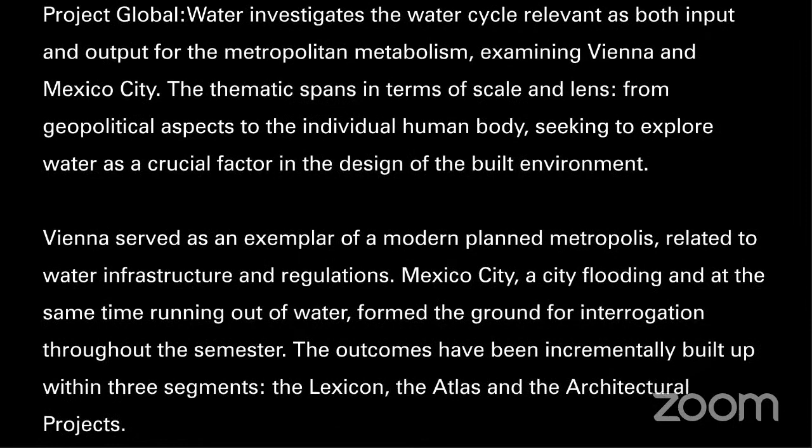Vienna served as an exemplar of a modern planned metropolis related to water infrastructure and regulations. Mexico City, a city flooding and at the same time running out of water, formed the ground for interrogation throughout the semester. The outcomes have been incrementally built up within 3 segments: the lexicon, the atlas, and the architectural projects.

Through keywords, objects, institutions, ideals, and failures, 60 lemmas set up a lexicon, aiming to explore water systems and their components on a global scale.

From fresh water to waste, and from water culture to conflicts and control, the selected lemmas interrogate the space between optimization and disaster, mythology and politics, potable water and commercialization, underlying a collective understanding of the framework.

11 maps of Mexico's past, present, and future, and 4 mini-atlases related to the water cycle, relate the principles, as documented in the lexicon, to the specific geographical, social, and cultural characteristics of Mexico City and the surrounding territory.

From the ancient Altepetl to the 2021 ninth largest metropolitan area in the world, the Valley of Mexico has always been dominated by water issues throughout history.

The aquifer, along with the water supply, consumption, and waste, remain the 4 main reference points that inject the metropolitan metabolism to the natural flows of water.

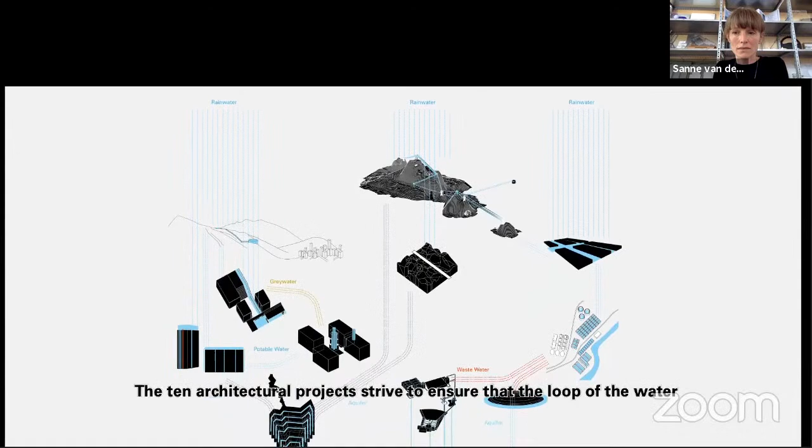The 10 architectural projects strive to ensure that the loop of the water cycle is never threatened, proposing a stable water supply for the inhabitants of Mexico City.

To resurrect Mexico City from its current predicament, the contributions propose a future with the possibility to expand the water systems through different time frames for both singular and prototypical projects, while growing within its territorial conditions.

The water-related inputs and outputs for the metropolitan metabolism are broken down to categories: aquifer, water supply, consumption, and waste, composing Mexico City's water cycle.

When facing the paradox of a city flooding and at the same time running out of water, how can architecture contribute towards balancing the aquifer's twofold nature?

While inequality in water distribution remains a recurrent contention, how can communal interventions contribute towards a new water supply system within the existing urban fabric?

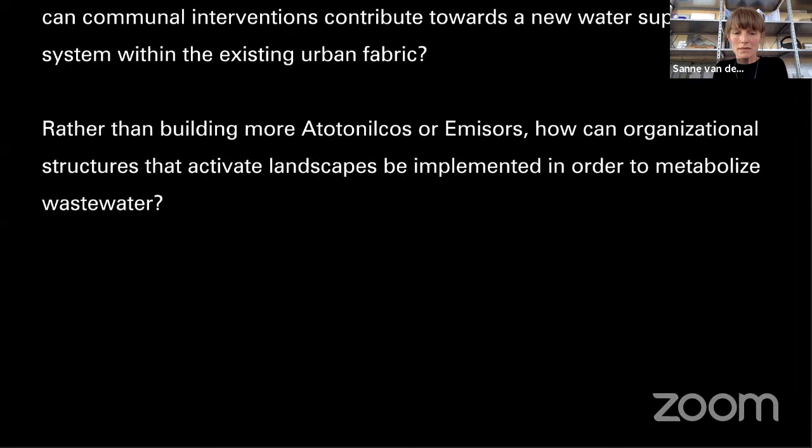Rather than building more atotonilcos or Emisors, how can organizational structures that activate landscapes be implemented in order to metabolize wastewater?

Good afternoon, everyone. We begin with a video on the first category, which is the aquifer. The video will introduce the aquifer along with the 3 architectural projects that provide solutions for aquifer recharge in Mexico City.

An aquifer is an underground layer of porous rock, saturated with groundwater. A vital water source holding precipitation that has infiltrated the soil, with both natural infiltration and artificial injection recharge potential.

In Mexico City, which lies in an endorheic basin, over 70% of potable water is derived from the regional aquifer system. At the same time, groundwater is extracted at a faster rate than it can replenish itself.

Impermeable surfaces are paved over natural recharge areas, and agricultural wastewater is withdrawn to the ground when the natural filtration process is not enough to remove all the contaminants. In the case of Mexico City, the aquifer overexploitation, the urbanization sprawl, and the lack of wastewater treatment are leading to subsidence, severe flooding, and eventual water shortage due to groundwater depletion.

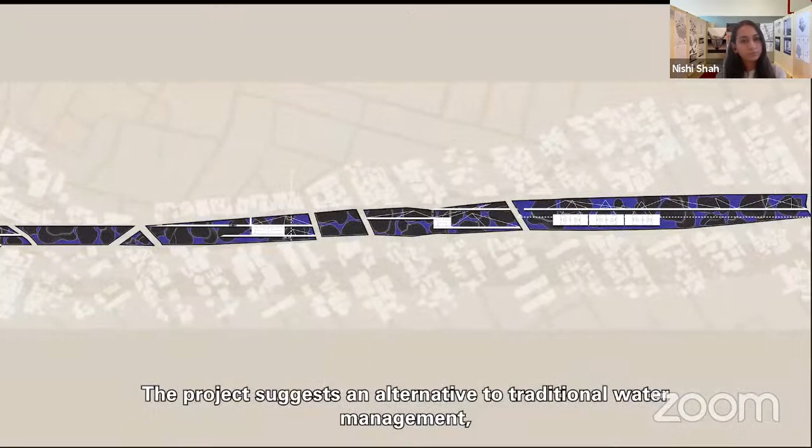The project suggests an alternative to traditional water management by densifying public spaces with a systemic perspective consisting of three acts. Act 1: Scar tissue.

Through the act of extraction, emptying between public zones, the restoration of the lava landscape is accomplished to suggest a novel recharge alternative that supplements traditional methods.

Act 2: Water dike. The height difference from the act of extraction is solved by the creation of a buffer wall that resembles a dike structure.

Act 3: Airways. The interventions of the restored lava bed forms are minimal and function as bridges.

From Luis Barragan's town planning execution in the Pedregal at the beginning of the 50s to today, the unique volcanic terrain has eroded. Tons of concrete and other materials covered the porous soil and blocked every possibility of alternative recharge of the aquifer in the most prominent area.

Part of the extracted material is reconstructed and reinforced by concrete, not only to support the adjacent existing structures, but also to protect the surrounding environment from flooding.

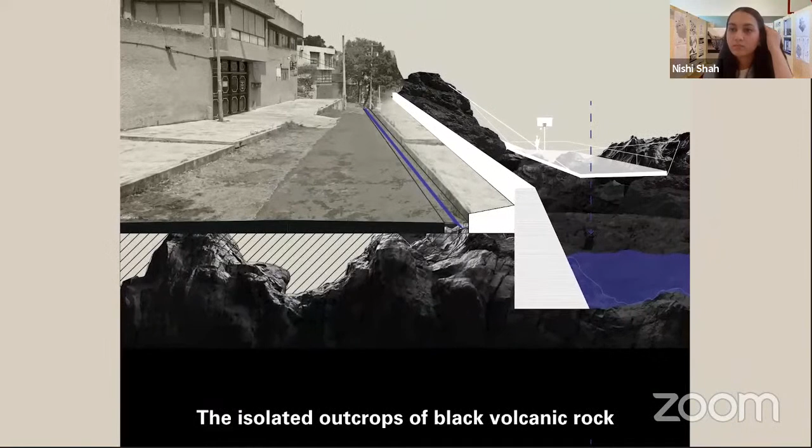The isolated outcrops of black volcanic rock are only remnants of a sublime landscape. The chaotically expanding city is deprived of its historical geoheritage.

The contribution is influenced by Barragan's early approach to the Pedregal, proposing a public water garden over the buried fragments of the lava landscape.

By reversing the direction of water flow on its site, Boca de Stalo is not only a rehabilitation of the city's aquifer, but a resurgence of people's dream of water amenities.

This project transforms the abandoned El Rollo Water Park, located in the third section of Chapultepec, into a civic garden, preserving its spectacularism by placing aquifer recharge equipment in the landscape, with its role as a regulating vessel to Mexico City standing crucial. The similarity between the megalomaniac formal language of leisure amenities and water infrastructure reflects on the city's water metabolism on two levels.

First, on the Federal District's current aquifer replenishment program that enhances Chapultepec's hydrological functionality; then on the historical groundwater overexploitation associated with recreational spaces. While the foremost goal in the rehabilitation master plan is to keep the surface water inside the drainage basin as long as possible for infiltration, such a process can still take up years.

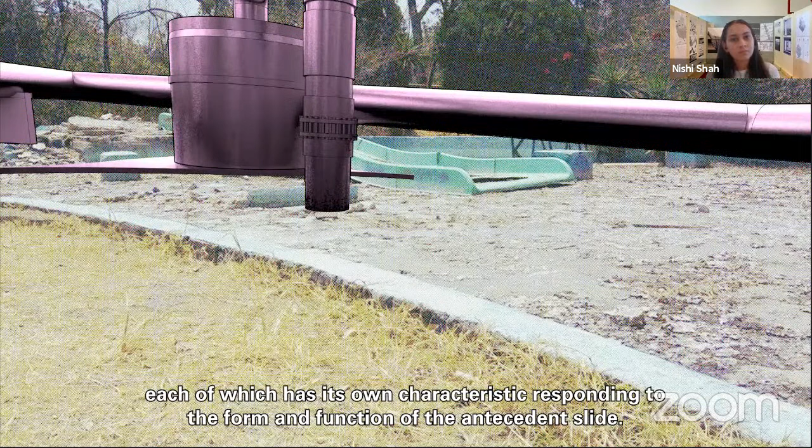Five clusters of injection wells occupy the ground of former water slides, each with its own characteristic responding to the form and function of the antecedent slide, while the vibrant purple pipes replace the deteriorated plastic tubes.

The pools, now all drained, become niches for visitors to rest. Here, in the center of every niche, is where the reclaimed water gets pumped into the aquifer.

Through the cool metallic surface of slides, the ruin of amusement attractions, and subtropical highland plants, the recharge garden creates a dry landscape with an abundance of water that questions the role of public recreational space in the city's water cycle.

Located in the southeast of Mexico City, Sierra de Ahuizotl, or Sierra de Santa Catarina as it is known today, is home to a range of visually striking monogenetic volcanoes that run the risk of becoming endangered due to extensive mining activity. One of the most dramatic and controversial elements of Mexico City, the Volcanic Chain, is currently a neighborhood park consisting of an important water conservation zone, a protected natural landscape, and a mining paradise.

During the rainy season, the rainwater runoff from the mountain hills, combined with the deterioration of the land due to mine exploitation, is causing severe flooding to the adjoining neighborhood of Iztapalapa. At the same time, the porous material constantly extracted from mining the area is considered the most efficient soil type to naturally recharge the city's aquifer, having the ability to absorb and purify water.

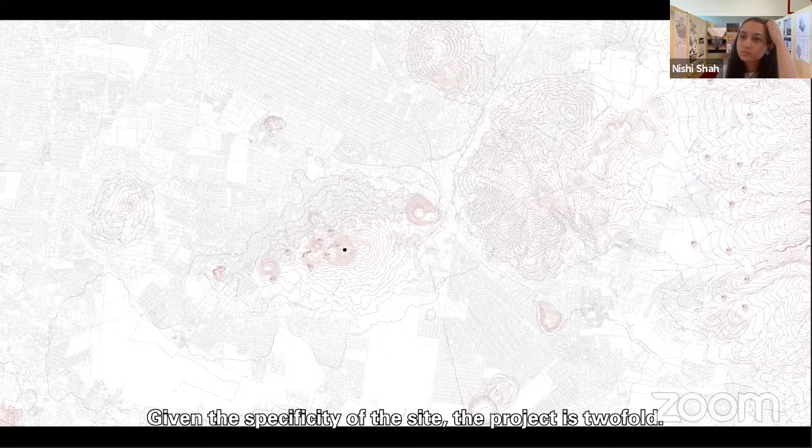This paradox opens up the opportunity for a strategic reclamation plan once all mining activity is over. Given the specificity of the site, the project is twofold.

On the one hand, the already formed cavities and scars on the volcanoes form natural recharge areas filled with water, with minor landscape interventions. Retention ponds, areas for water sources, infiltration terraces, gravity injection wells, and wetlands are formed in order to redirect, delay, and temporarily retain water within the site.

On the other hand, the volcano chain operates as a well-oiled water machine to meet both internal and the surrounding neighborhood's needs. For that purpose, infrastructure such as cargo funiculars, water towers, and cableways are added in order to transfer, exploit, and store water.

The project collects rainwater from the deepest point of Iztapalapa and relocates it to the Sierra using a funicular system. There, the input is purified and stored in the Xaltepec crater, which at the same time operates as a pumped energy plant to power the funicular machinery.

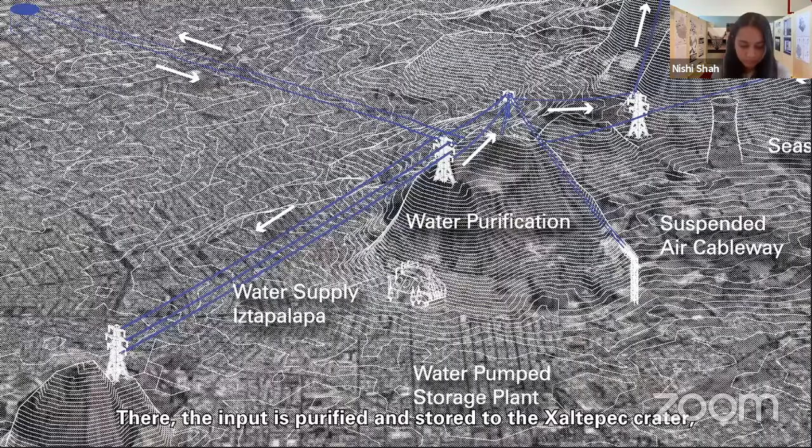The Mexico City aquifer system serves as a vital water source with infiltration and injection recharge potential that runs the risk of depletion due to groundwater overexploitation and the unmanaged recharge by wastewater related to irrigation.

At the same time, the aquifer constitutes the cause for the city's recurring subsidence and severe flooding. With natural recharge areas covered up in asphalt and the urban sprawl taking over the aquifer discharge points, both natural and artificial alternative recharge solutions stand crucial for the future of Mexico City.

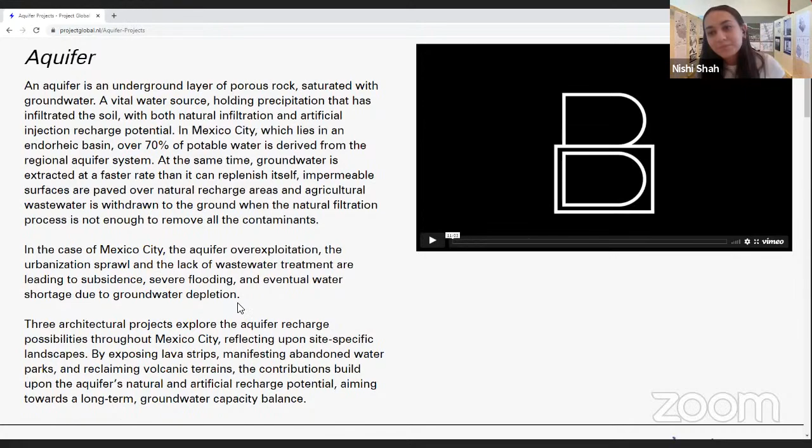Good morning to everyone. Thank you for the invitation, first of all. And if no one starts, I would love to start because this is a topic that is very compelling to me. Actually, it's been the motive of my research for the last 12 years.

And it's super exciting to see how it's been considered in other countries around the world and how input from people that have never lived in this basin are able to understand the problem and come up with ideas that are hard to find for people living here constantly. And that's obviously because we are used to deal with certain ways of managing water.

And it's always very enriching to have input from people that see it in very different ways. And I was very happy to see the three projects and how they have been able to convey ideas that have been placed into the design table at some points, and then to understand different and innovative ways of managing water, and third, to use existing infrastructure in very different ways that are directly related to aquifer recharge.

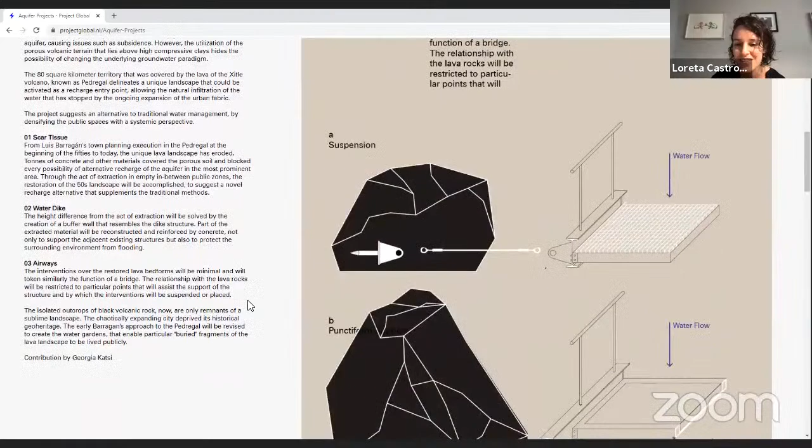The second one about water parks, I think it's really exciting, and it's an idea that is new, and I think it is a very good possibility. It's still super utopic in the way it's depicted, because you have these enormous infrastructures, and I think you need to put people into the rendering so that we can start understanding what's the relationship between the existing park and these new very prominent infrastructures.

I think the idea of reusing these water parks, not as recreational features but more as infrastructures that also have recreation embedded, is a strategy that needs to be put in place. Actually, it's completely feasible. It's something that has to be done, and that should start becoming a practice in the next years, even shorter time, in the next months.

And then the third project, about Sierra Santa Catarina, it's also very nice and exciting to see. I've been working specifically in Sierra Santa Catarina during the last 3 years, looking closely into the craters of the volcanoes, the type of soil, and the possibilities that this area has. It's a natural reserve that's completely embedded in the urban fabric.

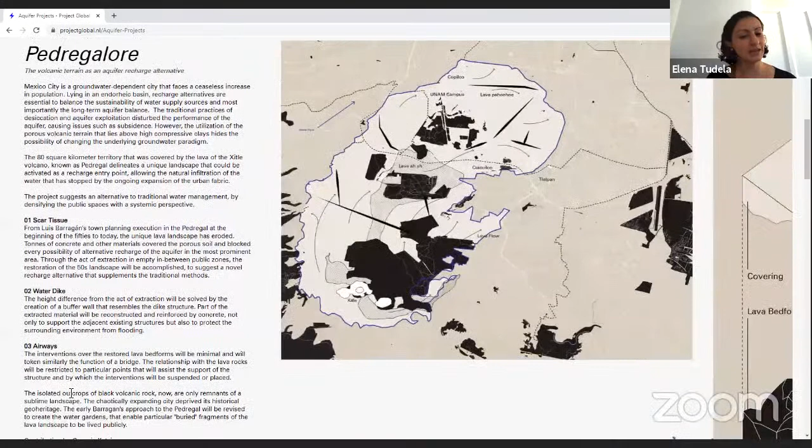So I really love the large scale of the projects you've presented. The first one has this huge scale of the city, of all the territory that was produced by lava, which has this very unique landscape. But then when you talk about Chapultepec and the possibility of infiltration, it also speaks of a larger infrastructure. And finally, the Sierra de Santa Catarina, which is also one of the main volcanic areas of the city that are very promising, and nobody's talking at this scale of operations from an architectural standpoint.

I also agree—I'm not sure if Loreta was mentioning this, but she did say something about proximity, like people and how they relate to these infrastructures, which I think is also very relevant. I would also extend it to vegetation, because the Chapultepec water park project does mention vegetation and how this tropical landscape sort of takes over part of the infrastructure and of the space itself. But we could also speak of not only people but also vegetation and species that could happen in the first project, sort of moving, because you're producing this idea of a connected lava ecosystem, which is very interesting in terms of the ecosystem services that can be provided because of that geography and that form you're using.

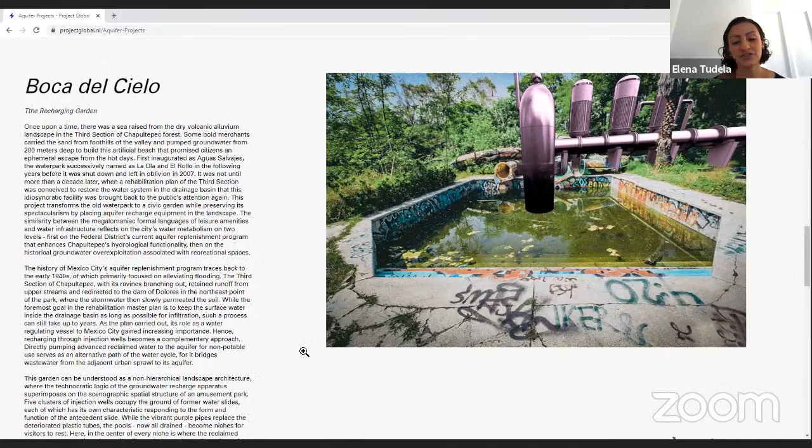In terms of the mining scars, I really like the idea Maria was mentioning. Going back to Heng Yu's Boca del Cielo Recharging Garden project, I think this idea of a dry landscape that actually reverses the direction of water flow and reverses metabolism in this very clear way is amazing. Currently they call it Chernobyl, just because of the aspect it has, and because it's been appropriated by young people with skateboarding and BMX activities. I think this totally goes along with what already happens in that place naturally.

And here's the thing, there's something tricky about reversing this metabolic function, which is the cost of it. So going one way or the other has repercussions in terms of what the benefits are and what the costs are, and there's a temporal aspect to it as well.

In terms of the benefits of injecting this water, they're much further in time, they provide the possibility of water sustainability for the city, whereas the other way around only provides for the very immediate need of water that usually comes from the aquifer, as you already researched. So I think there are some tricky things, but the provocation is amazing. And I absolutely love this reference between tubes and slides, that is very playful and interesting.

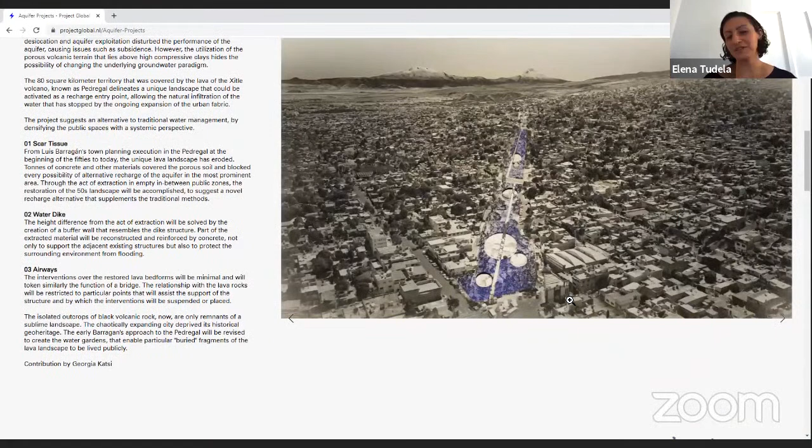Then there are some later differences between the first image you put in terms of the aerial view with all of these circles and different geometries, and then going back to only a linear project with mostly courtyards, which I think could be followed up with other types of uses. But congratulations to the three of you, this is amazing work. Thank you.

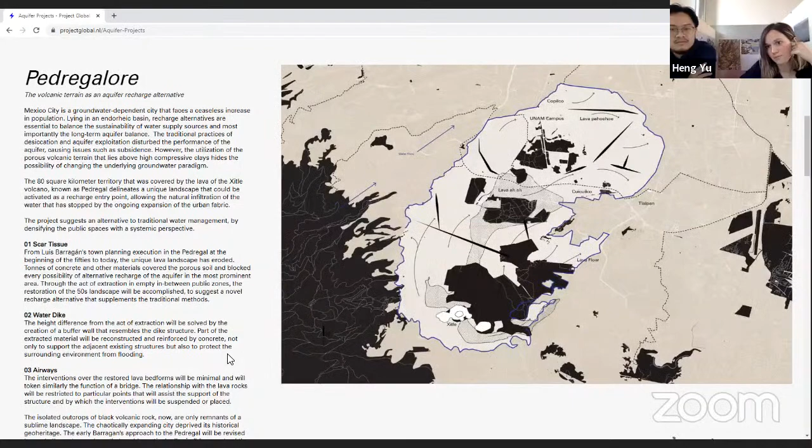Yeah, I mean, for example, I know that both in my concept and Heng's, in Heng's it treats somehow wastewater. In mine, it collects rainwater. Somehow they work exactly as George said, as a system, as a machine.

Let me wonder about this in a different way. An aquifer isn't recharged simply by poking a hole in it and pumping water, obviously. It takes some time - I have no idea how long, but it depends on the condition of the aquifer layer itself. So we imagine these projects that you set forth on day one really start to function or become something else quite some time down the way. During that period, we have the expectation that one day everything will be fine because all the water will slowly trickle into the aquifer. But until that period arrives, we are left with the pieces that are above ground or somewhere else. And the possibility that withdrawals will happen faster than you can refill the aquifer is also a very strong possibility for the near future. Therefore, I do wonder, at the end of the day, they do work as systems, conceptually that's very clear. But when we break it down into the parts that you would take over as the designer, are you the designer of the above ground or the underground? I do wonder.

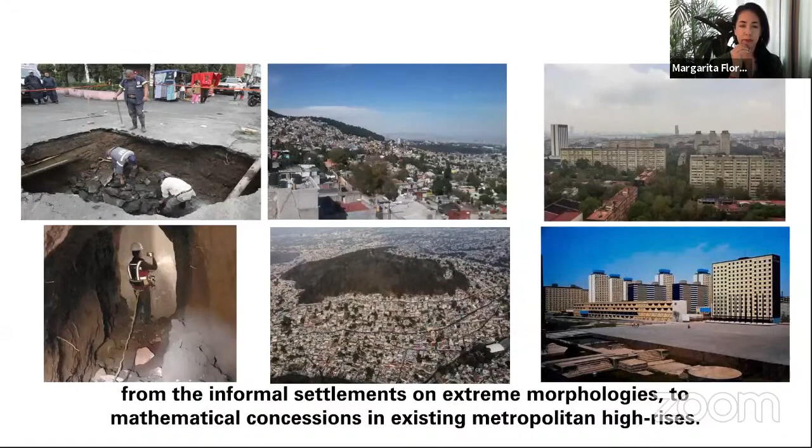4 architectural projects explored the potential spectrum of urban water supply and consumption systems, from the informal settlements on extreme morphologies to mathematical concessions in existing metropolitan high-rises. Mexico City's future to achieve a state of salvation from its current predicament is to rely on additional and external sources of supply, triggered with ingenious engineering, prudent utilization, prototypical local termini, and sustainable closed systems to mitigate the fragility in water flow.

Tlalocan, a utopian underground, provides skillful possibilities of water access through the large canyon, constituting 3 giant sinkholes that emerge in the Mexico City borough of Iztapalapa, caused by leakages in water infrastructure. The proposal of a neighborhood of inverted 9-stepped pyramids leads down to the nearest water source of groundwater and the first level of aquifer, alleviating the scarcity of daily access to potable water for the inhabitants of Iztapalapa.

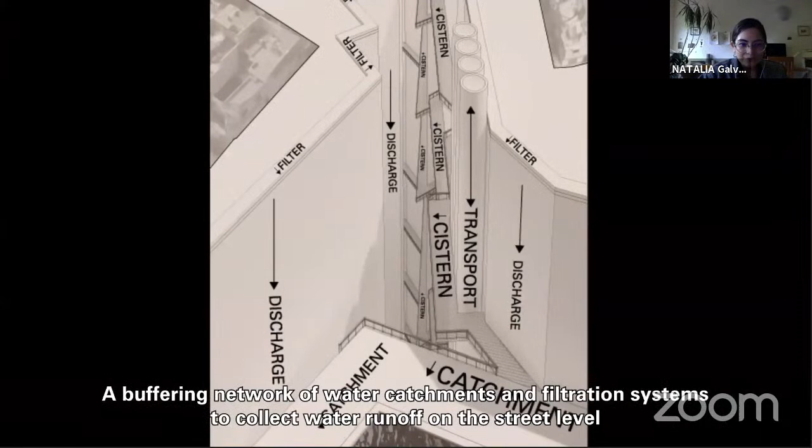A buffering network of water catchments and filtration systems to collect water runoff on the street level, the top edge of the sinkholes, accentuates water supply by replenishing the aquifers, especially during the months of heavy rainfall.

The first 3 levels of this engineered design iteration connect the existing city to the subterranean neighborhood, while the water table on the 4th level and the water spouts integrated with the housing on the subsequent 4 levels provide a system of channels and walkways inspired by the Aztec Empire for water to flow down.

The materiality of the retaining walls allows for a natural water filtration system, creating water features that provide the inhabitants with communal spaces. The final level poses a water treatment facility to collect potable water for the residents, supplied through rainfall, groundwater, and the aquifer, forming an underground living environment dedicated to water.

Cuatro Culturas is a prototypical proposal for a multi-generational dwelling through an existing high-rise, conjunto urbano, that was constructed in a specific social setting of economic growth period for the families of state enterprises.

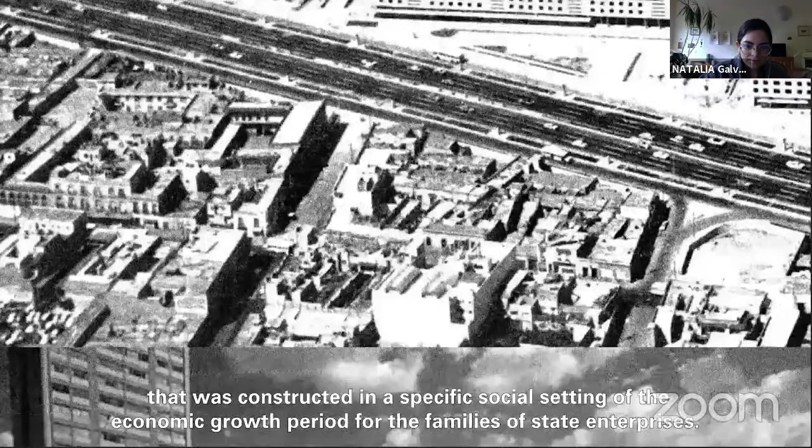The complex, originally an integration of commercial, recreational, educational, and residential facilities, remains a mere monument of the past economic growth after the 1985 earthquake, with unfinished restoration, broken infrastructure, and leakages in pipelines that make up 50% of water supply, hiding abandonment and exploitation of the built environment.

The paradox of such apartments remains between high unaffordability due to prestigious location and earthquake-damaged buildings occupied by low-income residents. Collective use as a new culture, Cuatro Culturas, mitigates the dependency on the government's inefficiency to unite the residents of Tlatelolco in smaller communities with independent water cycles in their homes through an exchange of square meters for water access and building safety.

The initial stage to achieve this building transformation occurs as an earthquake reinforcement program, using water as part of reinforcement through rainwater catchments on top of the building to counteract shear movement, through hydraulic elevators as a safety exit during earthquakes, and through a new water supply system for rainwater catchment in the side pillars.

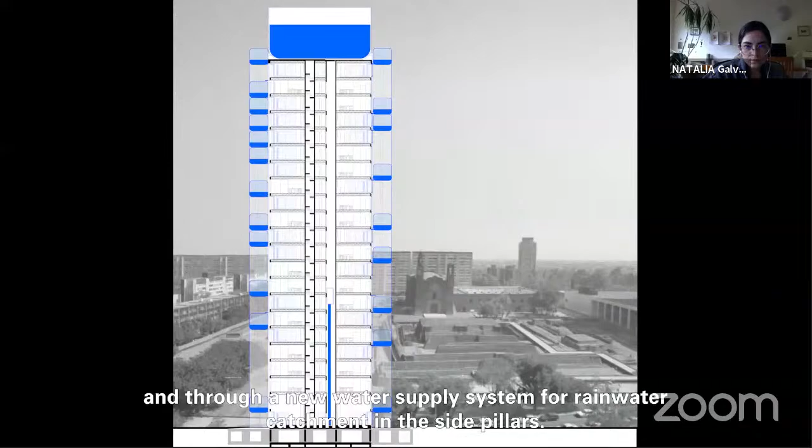The abandoned first floor occupies shared water facilities for the neighborhood, supplied by water collected from the roof and courtyards. The high levels, with inadequate water access due to unsuitable pumping, function as emergency rainwater facilities with showers, washers, kitchens, toilets, and grey-water treatment tanks to guarantee water access during the transformation of flats from private family apartments to collective dwellings for a group of inhabitants.

The proposed reformation subdivides the existing structure of the apartment into 3 studios with common water facilities.

Shared water facilities are strategically designed in the center of the floors, leaving the possibility of using the existing standpipe to provide an alternate water supply source adhering to rainwater catchment and grey-water treatment.

Thus, a new self-sustained water cycle introduced in the existing building can provide water through the two extremities of Mexico City's climate, by rainwater supply in heavy rainfall seasons, and by operating as a closed water cycle through grey-water reuse.

During dry months, prototypes of shared water facilities are prefabricated and designed in different configurations, catering to the different building types of the 1960s collective housing to provide alternative solutions for water supply, thus stimulating affordable housing in the metropolitan city.

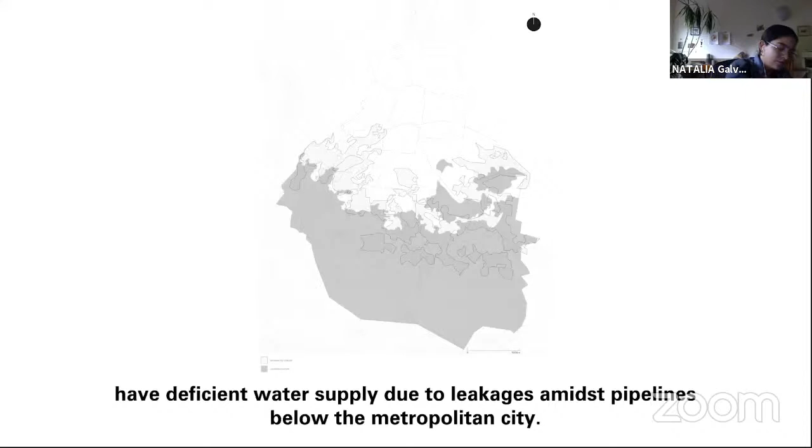These informal settlements, struggling due to social inequality, have deficient water supply due to leakages amidst pipelines below the metropolitan city, with contaminated water from faucets, and are forced to rely on private companies for water. The daily lives of these residents remain an inconvenience while spending a quarter of the day and more than 10% of their income arranging water access.

The Cutzamala system, which provides 18% of Mexico City's water, lifts water over more than 1,000 meters and terminates 300 meters below the foothills occupied by these informal settlements, circumventing and leaving them without potable water.

The problem arises in the intermediate scale of distribution, where the negligence of maintaining interstitial infrastructure, such as underground pipelines and pressure pumps, becomes the factor disrupting distribution.

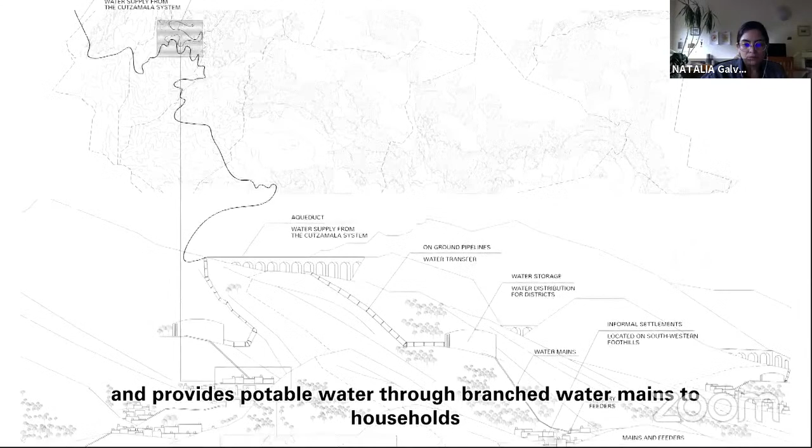The project introduces a new tangent in the Cutzamala system with a modest aqueduct that follows the contour logic of gravitation and provides potable water through branched water mains to households in all informal settlements without any expense on pumps. The pipelines within this network remain on the ground to provide better maintenance possibilities and avoid leakages, thus being prudent.

The proposal also aims to capture rainwater on a communal scale through a new public spine that acts as a water collection device intersecting all houses while providing structure and collectivity to the informality of these settlements.

The two strategies tie up to channel a parallel route for water that follows the laws of gravity and provides alternative water supply systems as a prototypical self-built solution.

The proposed water infrastructure becomes the ground for artificial topography for the informal settlements that remain undefined and lack collective interventions, such as pavements and public squares, to introduce buffering moments of infrastructure by creating privileged spaces within its network for communal gatherings.

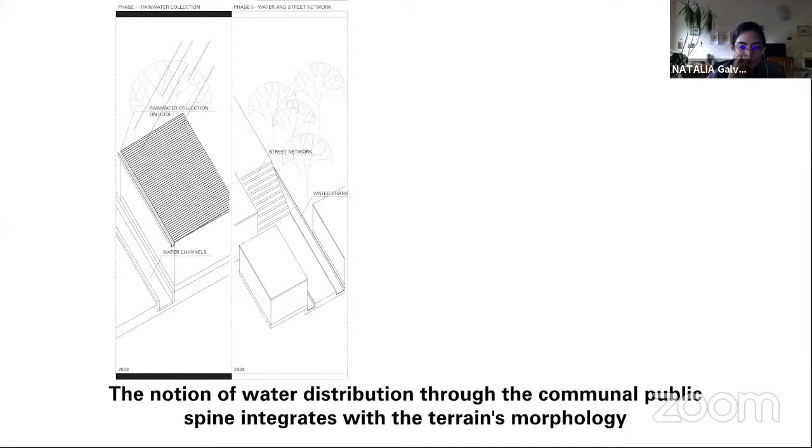These buffering basins provide water for consumption to a hierarchy of shared facilities supplied with treated rainwater, while the Cutzamala continues feeding individual households. The notion of water distribution through the communal public spine integrates with the terrain's morphology, providing significant interstitial spaces in its urban design, thus resolving water shortage and vulnerability of the distribution network.

Pipe Dream, a closed-loop water cycle system, aims to lower the dependency on the municipal water supply by proposing the insertion of self-built water infrastructure into the existing fabric of Magdalena Contreras.

The informal settlements in Mexico City are built in the conservation area, and therefore households in these neighborhoods lack water supply infrastructure. The residents of Magdalena Contreras rely on water supply from municipal water trucks that fail to fulfill their daily water consumption.

Moreover, the inconsistency in the schedule of these water trucks suppresses water consumption for the residents compared to any average neighborhood in Mexico City.

As a result, the residents of this neighborhood actively practice water recycling strategies by reusing water from the dishwasher to clean the house, or by reusing shower water in the toilet flush while awaiting the next water delivery to fill up their tinacos. The proposed self-built water infrastructure integrates the water recycling process on a larger scale to maintain water circulation within the settlement, thus creating a closed-loop water cycle system for water supply and consumption on a neighborhood level.

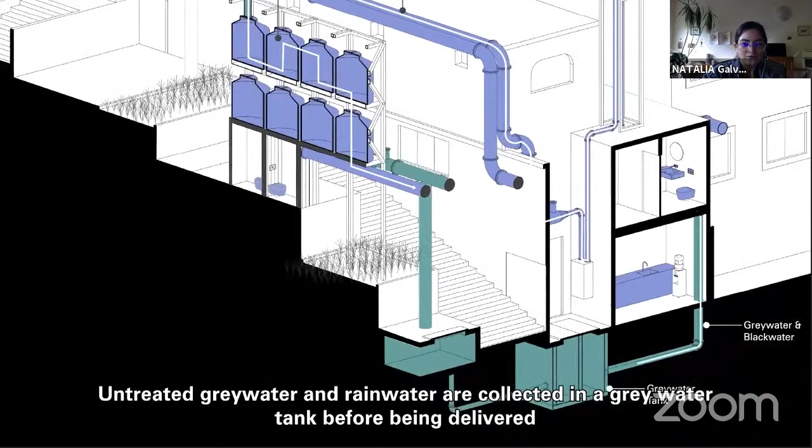Untreated grey water and rainwater are collected in a grey water tank before being delivered to an artificial wetland through the water pipes, while black water is collected in a septic tank in each household or sent to the neighborhood septic tank, where the solid waste is finally collected by a municipal waste truck, and the liquid waste is delivered to the artificial wetland for further processing.

Through this process, grey water collected from the higher elevation is filtered into clean water for use in the lower elevations.

Greywater from the lowest level is pumped back to the water facilities at the top of the hill to close the cycle. The water treatment facilities at the highest elevation supply excess water from the system to recharge the groundwater in the conservation area with a porous landscape.

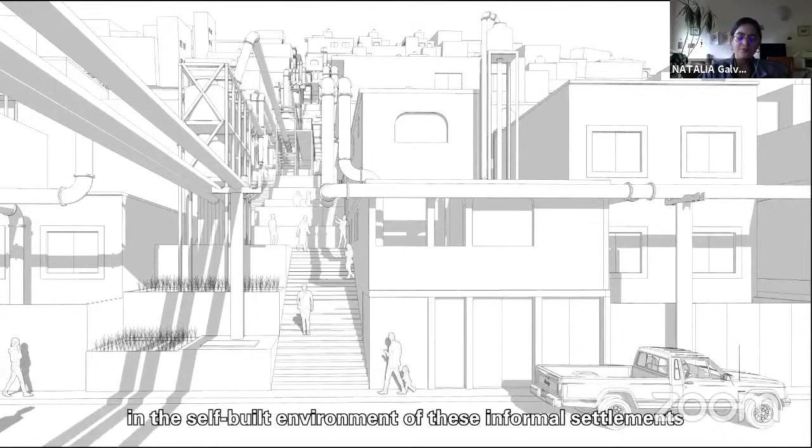The proposal of a closed-loop water cycle system provides relevance to water both as an input and output for the metabolism of the neighborhood. The proposed system of a new water infrastructure consisting of a central septic tank collector, artificial wetland, greywater tank, biochar filtration tank, and clean water tank is deliberately designed on steep streets without car accessibility, following the logic of gravity.

Mexico City has had an extensive saga with water sensitivity and finds itself at its brim with paradoxical water shortages and flooding disasters due to unnatural obtrusions.

The four contributions address the specificities of supply and consumption pertaining to the water cycle. Through contemporary and vernacular solutions, the proposals provide alternate systematic shifts against the current centralized system of water distribution in Mexico City, identifying opportunities to balance the growing water demand. Now more than ever, self-contained solutions in different configurations of the urban fabric stand crucial, with a growing urgency to improve resilience from a potential water crisis.

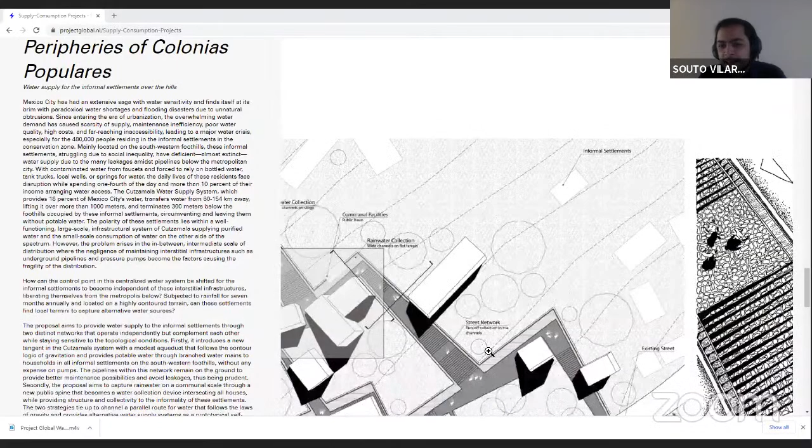For example, the one in Tlatelolco reminded me a little bit of Torre David in Venezuela, and later projects some people tried to implement. I don't know if you're all familiar with that project, but it's this high-rise in the middle of Caracas, which was abandoned, and then infiltrated by people who just took over the building. This unregulated community started to live in a high-rise building, and dealt with all the potential problems that living in an unfinished high-rise generates, like paying people to bring your water tanks up 30 stories for drinkable water.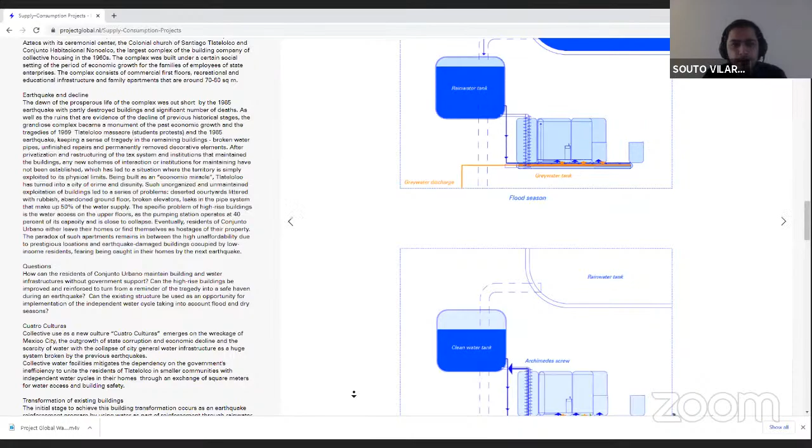So it speaks a lot about, I guess the word is resilience, and working as a community dealing with very intense and problematic conflicts that we have in Mexico. And the other thing is just how well you are all evidencing the situation we are in, from buildings like Tlatelolco to the fact of how difficult it is to pump water to the unregulated settlements, not only because of poor infrastructure in Mexico, but also poor maintenance of that infrastructure. So those are the first thoughts that come to mind after seeing the presentations and reading a little bit about them.

Okay, well, congratulations on all your effort, students. The project seems really nice.

As Andres, I'm really glad you talked about the government inefficiencies, but when I look at the projects, I actually feel that there are projects that need a lot of money to be made. For example, the last project, the one in the informal settlements, where the pipes bring the water down from the upper part of the settlements, this one, the pipe dream.

It seems really interesting because I think we all Mexicans believe that one of the things we can actually do to avoid the water crisis is to collect the rainwater, right? Actually, last night we had a huge storm. We have been having huge storms, and all this water goes to waste and goes to the same place as the black waters.

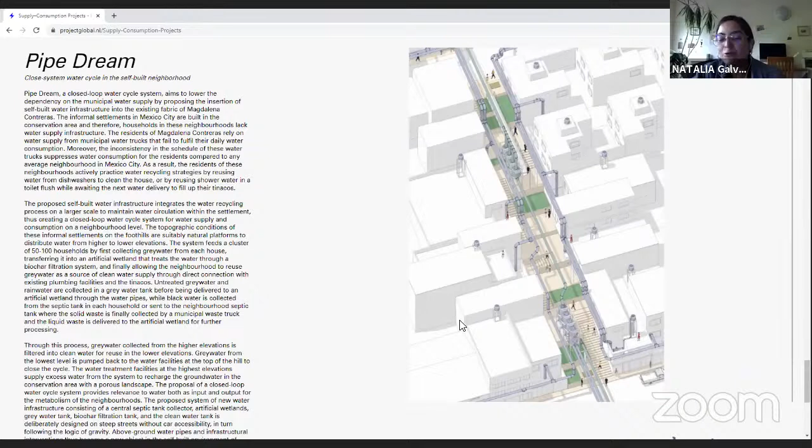So this is where I struggle with what to say about the projects. The one that actually made more sense to me was the Tlatelolco one. May I interject, Natalia? Of course, Salomon. Into this, because I empathize with your point, right? Without a doubt.

But I also think, to maybe take the contrarian argument, is that the ambition of many of these projects is also to think about the large scale and to set visions of how one can think differently about the situation, right? So even if it's just a fragment of something at a much larger scale, it's also to rethink the architectural imagination and how it is conceived and appropriated by governmental or municipalities or by communities themselves, right? It's how do we set forward a set of speculations to reimagine what could potentially happen on the ground.

So I believe it's always a kind of balance between what is really on the ground, as well as what kind of visions can be set forth to rethink certain circumstances. I mean, that's actually the privilege of being within an academic context in reality, right? To imagine something different. I just throw it out there for conversation.

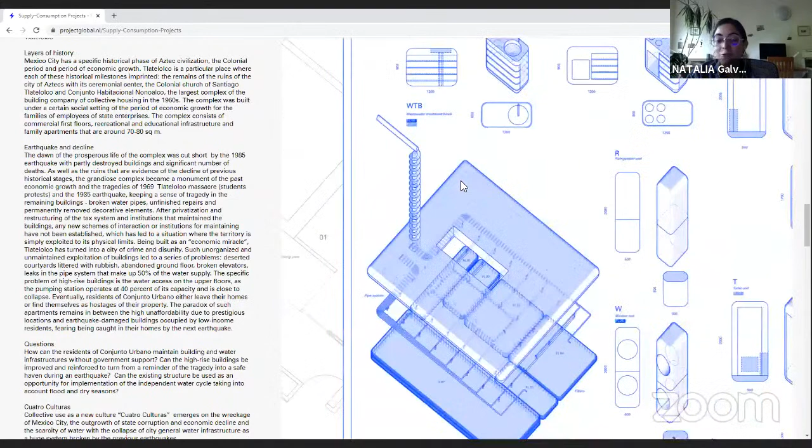I think you're absolutely right, and I get that this is the point of an academic exercise. And in that sense, the work is great. I think maybe it is in the big scope that I see the difficulties. There's actually a firm in Mexico called Isla Urbana, and they work with rainwater capture

in a small scale in informal settlements. Nevertheless, I get that the assignment was to think big and challenge those sort of problems, which I think is great. And that's why in the one in Tlatelolco, I really see a lot of potential, because Tlatelolco is actually a community that's well organized, and it's a great place to experiment

capturing water at a big scale, but at a still manageable scale. So this exercise, I think, is really good, and it really portrays something that could happen, because you have all those roofs on Tlatelolco that could be capturing that rainwater for all the people that live there.

I'm gonna let someone else speak. Thank you.

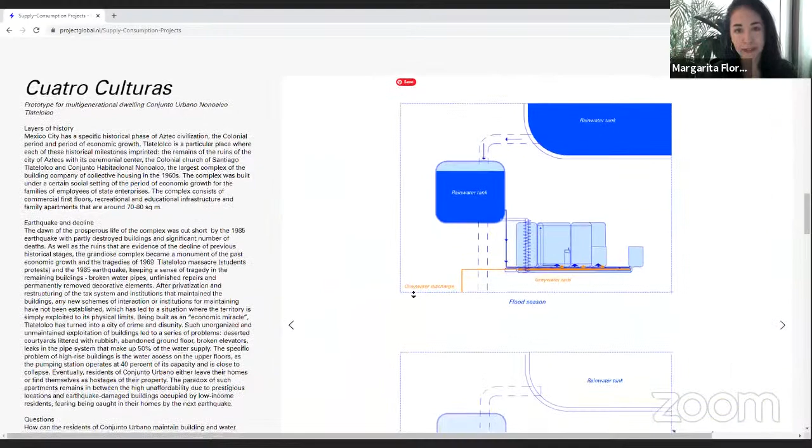Talocan, I imagine it as a line project, no? It goes with the strategy of the line. On the other side, Cuatro Culturas is more like a point, if we imagine the city from above. And I like that the line goes under, and then the point, in this case being Cuatro Culturas, goes up. That's very nice.

And I like the idea of an inverted pyramid. And also, if you go up, there is this row, like in section in Talocan, where the water is going down. It's like a cascade going down all the way to the source or to the aquifer. And this case is for me like a new kind of urban space.

Like a public space that is kind of being ruled by water. So it's a really fascinating, fantastic way of imagining the city. For the Cuatro Culturas, it's like Kisho Kurokawa comes and meets Mario Pani.

So that's very funny for me. I cannot stop thinking of metabolism when I see the form that you are using to integrate these capsules, like water intelligence capsules, let's call it that. So the image at the end, and the big section, for me, I like that every project has this ironic way of visualizing architecture. Ironic is intelligence, but also it gives you surprises.

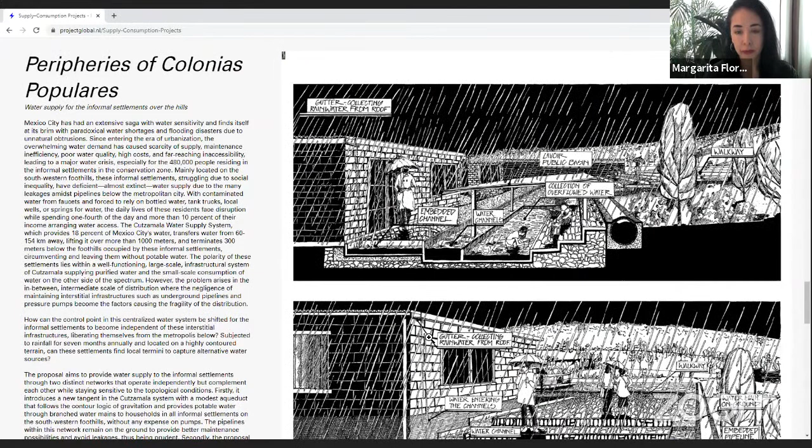So I love that. And for the other group, it will be more about surfaces. It's like you need a space in the horizontal view in order to build. And also you have one that is going down, the first one, the peripheries, where you start to do excavations on the ground. And it makes me think of, like if you are building an archaeological site.

Like we use the origin of our culture, and of course it has to do with the management of water in a more natural way. So congratulations for that analogy.

And the pipe dream, that's very funny. I think it will really work. I can totally imagine those pipes going all the way there. It's like if you are bringing the Pompidou to this neighborhood. So yeah, congratulations on these ideas. And I would like to know if you had this strategy, like we go surfaces, we go up, and we go down, or it was just a casualty.

Maybe for us, that was more like a cycle happening constantly in all the projects. So the cycle is not just related to the water flow and not very much to do with the surface. But yeah, the projects are organized in a way to see how they relate with each other in an order, like the second relates to the third relates to the fourth. So something like that was intentional.

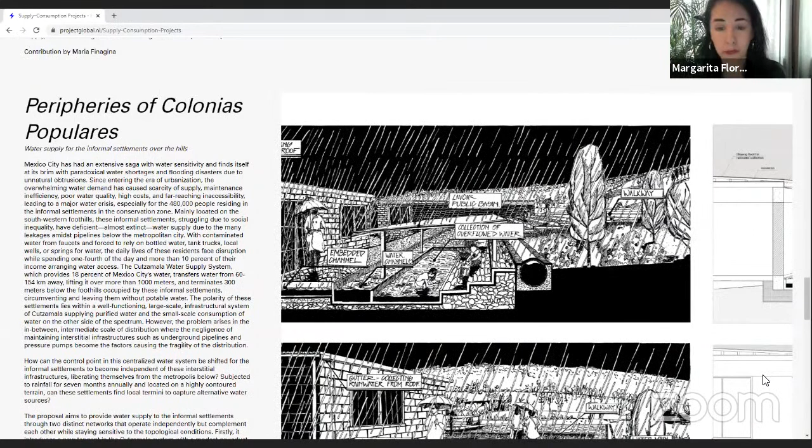That's right. Yeah, but as you say, water flows, and by thinking on that, you got to this project. So it's really fascinating in terms of the brief too, how water allowed the students to imagine new ways to build a solution in terms of architecture. So congratulations to all of you.

I think the four projects very nicely describe four different situations of the water crisis in Mexico, right? Some dealing with topography, some dealing with getting the water up, some dealing with, as you mentioned, the point, in a single point, bringing it up and down. So I think it very clearly through four projects speaks a story about our relationship to water in Mexico City. Yeah, like put it there, in a more systematic and strong, intelligent way.

I'm sorry if I keep interrupting, but just with these last images, I wanted to talk a little about these drawings specifically, the very sketchy ones. I think something very strong in architectural representation is when it has some communicative factor to the actual people you're speaking with. And in that sense, this comic kind of representation is very efficient, because when you see how people, for example in unregulated settlements, access information, the kind they more easily understand to do technical work ends up having to do more with these less technical drawings. So I think these drawings also speak about the public the project is addressing, rather than maintaining a very academic and technical speech.

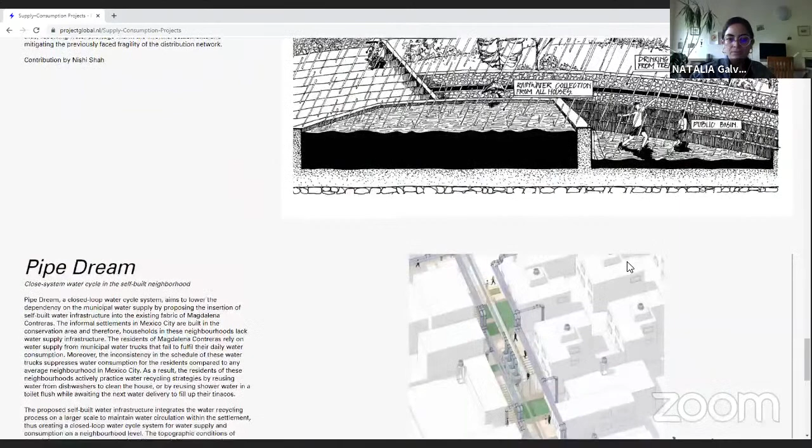Yeah, to answer the first part, I wasn't aware of what you mentioned. The basins are the public basins, so I didn't refer to that.

The second thing, about the communal intervention, in this particular diagram, or maybe the section here, the first one shows that there's this water catchment where activities like washing clothes or just recreational spaces can be integrated within this channel of water catchment itself. So people have that collected water to go there and wash clothes or just sit around, and then it later also gets filtered, the rainwater, and it provides water to drinking water fountains in that particular area, which is the lowest point in the community. So the whole system is just for one particular neighborhood or community. That's how it integrates.

Thank you. There's, I don't know if... oh, sorry, go ahead.

This question of collective use, was it addressed to this project or in general? It was in general.

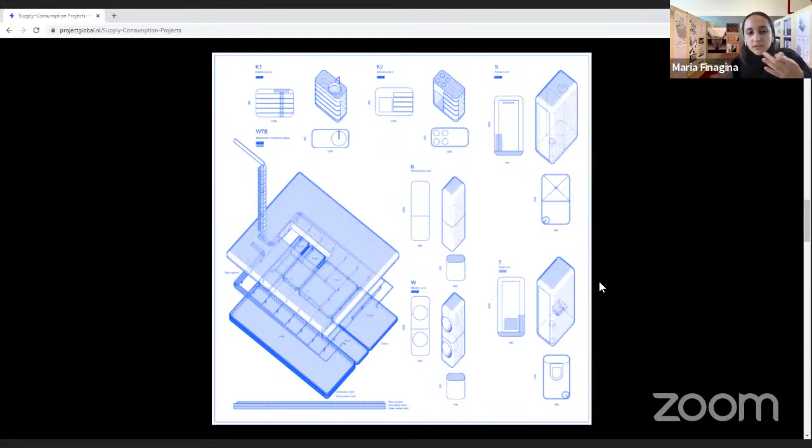Yeah, we thought a lot about this, and many interventions are more prototypical. So it's like to start with one example that, if it's successful, can be a driver for people to continue this transformation or to join somehow. Here, for example, it can be like the process to reinforce the building, so it can also be a reverse process, like if the city will somehow fix the current problem with water supply and pipe systems. It can be reversed in another way, because all infrastructure is kept in the same place. So it's just a new layer of prototypes of this intervention, some small decisions that can be implemented and then can again reverse this process back.

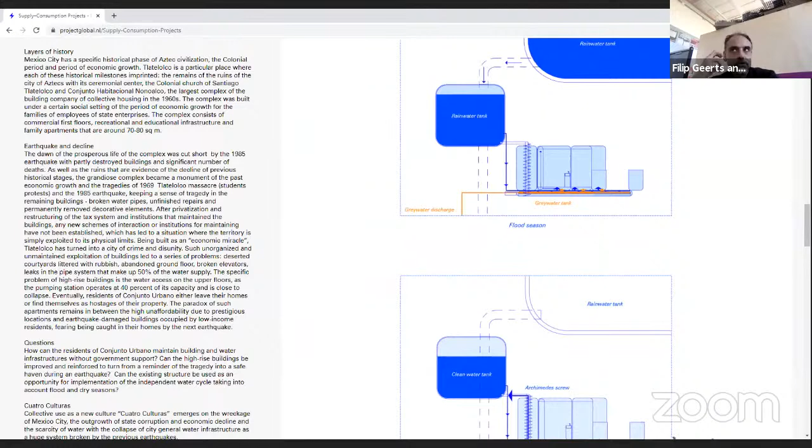The other thing, I guess for Maria, for the Tlatelolco project, I was wondering how much placing that huge water tank on the roof of what are arguably rather weak concrete structures would matter—first of all, if that's something you considered, and second, if the tank is not on top of the roof but on the ground, would that change the project?

That's a question, right? And the third one I'd like to ask regarding the third project we saw, with the Colonias Populares. I wonder, for example, how are you thinking of having such a fixed landscape, and somehow, as you mentioned, an undefined housing area, because of course the housing doesn't have a plan. So maybe those three questions, if you could briefly just answer.

Hi, can you hear me? So for the project itself, yes, it's supposed to be flooded. On the bottom level, there are a bunch of cisterns to collect the water when it does rain heavily, and then it forces the water into the first level of the aquifer, because the first aquifer is pretty much minimal at this point—they're already tapping into the second aquifer below. So this is a way to recharge the first level of the aquifer and hold the water for the community as well, so when it's dry season, they can pump it back up and use it for the specific area. So it is meant to be flooded at this level, at the bottom level, for this particular reason.

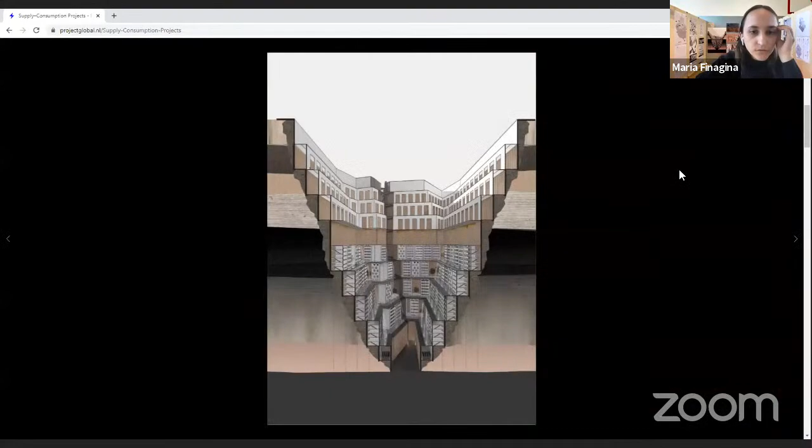For Conjunto Urbano, the first idea was to use water as reinforcement of the building, so the water can be a counterweight of the building during an earthquake. Such examples already happen in Taiwan and in America. There was an idea to put water catchment on the ground, but then we need a pumping station, and that's a problem to maintain this infrastructure. That's why having a tank on the top can work without pressure, without additional infrastructure that needs to be maintained.

And also this side support element can make it more possible, like half of the weight going to the building to rebalance it, and these side pillars support the overweight of these water volumes.

And for the third part, in these highly undefined settlements, the landscape intervention basically follows one logic, which is to go from the higher point to the lower point so that the rainwater can be collected. It finds its way in between the fabric of this informality of the settlements, so it's not a very fixed thing, but it just needs to follow this higher-to-lower contour logic. That's it.

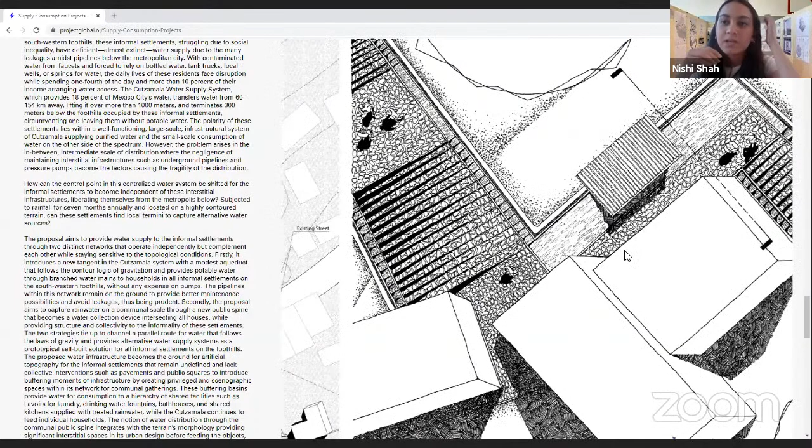Maybe also something related to what Natalia was mentioning earlier about how some of our projects deal with this expensive infrastructure. The idea was, since we cannot completely curb the reliance on government water supply sources, to find solutions at a communal scale, or maybe self-reliant scale, that provide an alternative source of water supply. There are always these problems existing currently in this government infrastructure, so how can we go beyond relying on just that source and add something more to these different fabrics we're dealing with in the 4 projects?

I think it's really interesting that you look for alternatives of consumption of water supply. I think it would also be interesting to see this at an individual scale more than a community scale, because of course the aim is to do it communally since that works better and you have more resources. But it's also hard to organize a big community, even if it's just one neighborhood. So maybe it's also a good move to look for an individual alternative, like a catchment on your own roof or smaller alternatives. I get that wasn't the assignment though, but I think the 4 projects present really interesting alternatives.

This one, where you acted in the south part of the city, Xochimilco, I think is really interesting because that's also a part of the city that actually has a lot of water. It has live canals, the Canal Nacional, the Xochimilco canals. So there are big places to absorb water and restore it back to the aquifer, and also to contain it for different housing uses. This is really interesting, and it's a part of the city in actual conflict right now. They're destroying one of our last wetlands in the city to build a street as we speak, because Viva Mexico. So this is absolutely a theme that should be addressed. Congratulations on that.

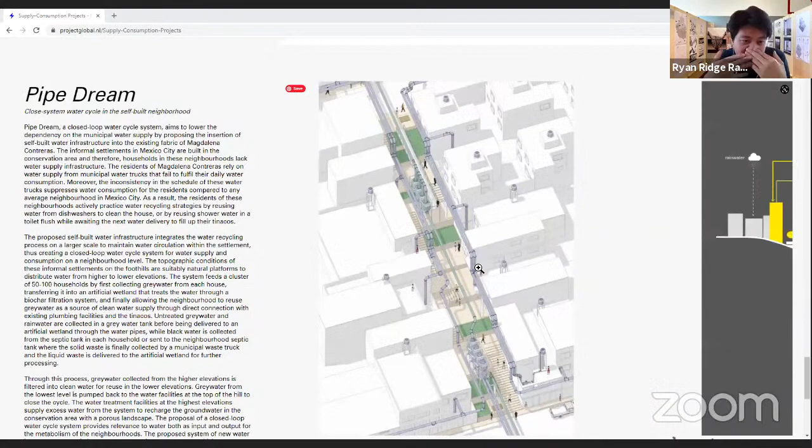But I think this problem is not only the problem of the community, like in Magdalena Contreras, but also for the whole of Mexico City, because there are a lot of residents there too. So I think for the funding, maybe the government should also be able to start this project to give water supply to the residents there. Yeah, they should.

Another thing that comes to my mind is maintenance of these projects, because maintenance is a huge thing in Mexico. I know as architects we can't think about everything and can't completely grasp everything, but I think it's another thing to consider when you're projecting in a Latin American city where the government is not really something you can count on. Maintenance is a big thing, so maybe we should be thinking about projects where the maintenance could be self-done or is not really necessary. I don't know, just throwing that out there to give something to the conversation.

I can quickly answer that. We're all trying to make this water supply work just by gravity, so there's actually no need for specific infrastructure to be maintained. The water just goes down. Maybe this is a quick question because I think we're very close to the end because of our schedule. Everything works by gravity in the four projects, right? That's great. Yeah, that was the question. We searched a lot of scientific information on how to make water go down, go up, because it's all physical - I don't know how to say it, the physical way of water. So it was very interesting.

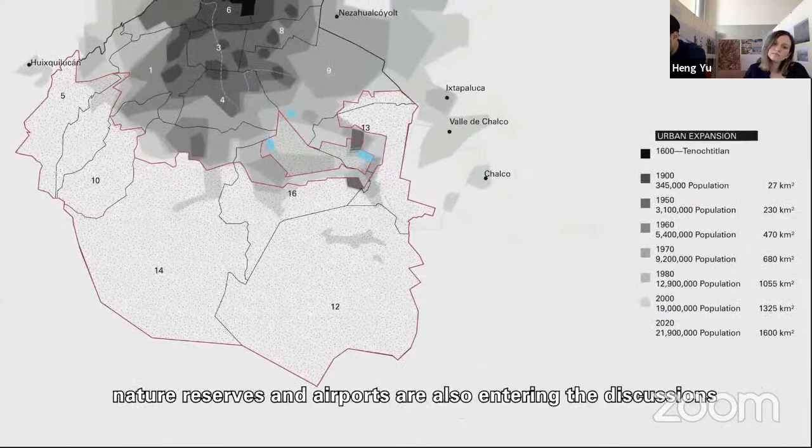The Tula and Mezquital Valley is now a vast agricultural region irrigated by the wastewater of Mexico City. This relationship between wastewater and agriculture has existed since the time of Tenochtitlan, when the chinampas were invented and proliferated in an attempt to feed the city. In addition to the farmlands and the urban sprawl, nature reserves and airports are also entering the discussions around water in Mexico City as conservation and globalization manifest themselves spatially within the valley.

Three architectural projects explore the intersection of wastewater and agricultural practices in the greater region of Mexico City through specific organizational structures. From the government to the cooperative, these three different organograms dictate Mexico City's future perspective on wastewater as both an input and output for the metropolitan metabolism.

Even after leaving a wastewater treatment plant, the water feeding Xochimilco at the base of the mountain range needs to be cleaned once again to better preserve the historical landscape. By incorporating parts of a wastewater treatment plant with an unconventional source of waste, an experimental solution to heavy metal accumulation in the water and soil could be implemented systematically on a local scale.

The chinampas that define Xochimilco, a World Heritage Site, are kept together by stakes and willow trees, called ahuejotes. This establishes a soil bed for agriculture and the filtration apparatus for waste. As a grid-like pattern develops, the remaining lake in between becomes natural waterways, where the axolotl, an Aztec god known in the form of an adorable amphibian, lives.

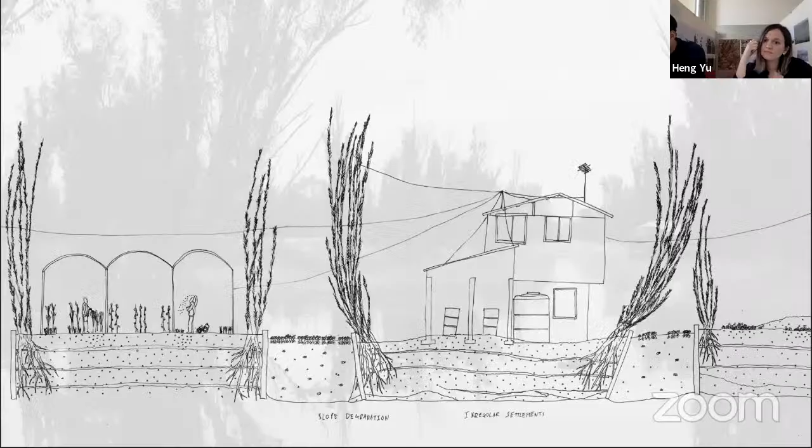Now the region is reliant on water containing heavy metals sourced from wastewater treatment plants. As a result, the tilapia and carp that were introduced as alternative food sources are no longer considered safe for consumption. With no native species to slow the tilapia, this fish and the water hyacinth that came with it dominate the aquatic life in these waterways.

However, these alien species provide a new opportunity for water treatment. Water hyacinths can rapidly absorb heavy metals due to their aggressive growth rate. As it accumulates most in the roots of the plant, by removing this part before using the tops as fertilizers, the soil and water can immediately be improved. Starting from this labor-intensive method, new experimental ones can later be introduced.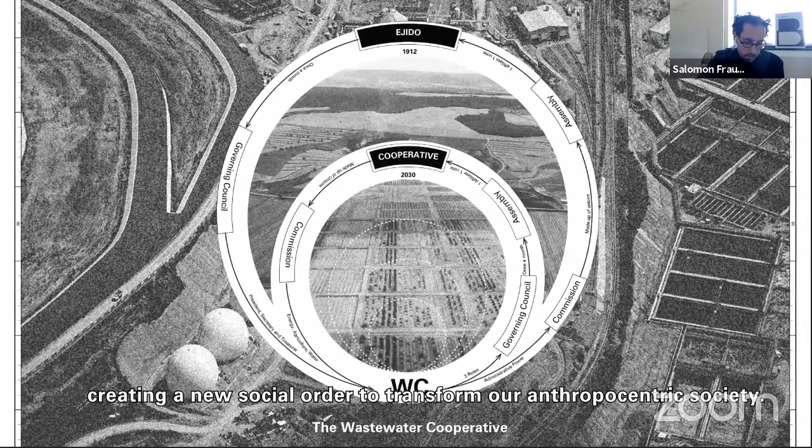The transformation of a city's attitude towards wastewater is an ongoing process that has always been closely tied to politics and culture. From ancient techniques of water separation and drainage to water collection in the Mezquital Valley nowadays, adjustments to the wastewater organizational structure prepare the ground for individuals to re-examine what they leave behind.

When it comes to wastewater, there is no consistency. It can be nourishing, toxic, or simply smelly. Identifying these differences and treating them accordingly is vital for the agriculture that supports a city.

Landscapes, buildings, and objects all facilitate a new perspective on wastewater within the water cycle. If wastewater is not properly managed, not only is the supply jeopardized, but more significantly, the current health of a city is in danger, as the food that cycles more rapidly enacts its revenge.

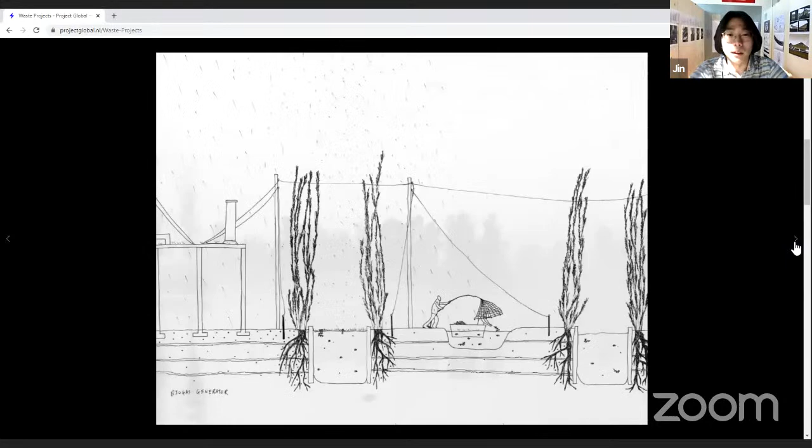I think that kind of complete removal of the introduction of heavy metals into the water supply needs to come from almost like a policy level that addresses the issue in all industries and just a way of life in a city. This is just a way to reduce the impacts, to minimize the concentrations of it through the process - not actually the fish digester itself, but these possibilities with these electrified soils that promote the absorption of it into the trees present in the chinampas, whereas the fish digester is more of a method to power it, as well as bring the biodiversity in the water back by addressing the issue of invasive species as well.

If I can jump in right there, I think you're mentioning something very important, Jin, and that is something that's not really coming through in the presentation, I believe, which is the encounter, almost the clash, of the endemic - species that are particular to that ecosystem, in fact found nowhere else in the world - and the presence of very aggressive exotic species. Tilapia and carp in Xochimilco are precisely that. So it's interesting to see how that presence of an aggressive exotic species can be controlled by a third element or component, which is the human, right?

If you think of these exotic species that were introduced in the beginning to increase the economic activities of the local populations of Xochimilco, and the environmental impact it has had, that came out of pure ignorance, really. It was not malintention. Yet, by reintroducing the agency of the human - and the Xochimilcas, as you know, are also endemic to that space - so that humans, and not only humans, but the Xochimilcas, become engaged in extracting the tilapias, I think is an interesting idea.

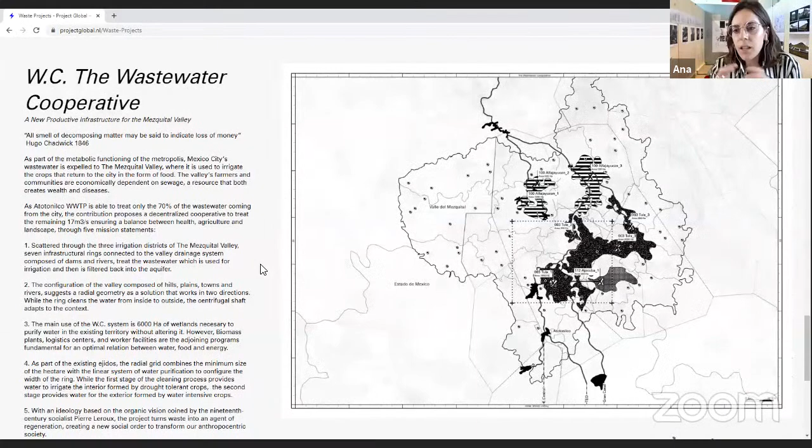Yeah, sure, I could start. I think one possible way of approaching or explaining how these projects would take place in Mexico is to demonstrate that small scale experimentations relate to this huge scale, and this scale is of course related to waste, waste being expelled to the Tula Valley, the Mezquital Valley. It's something that needs to be considered at the very big scale and also at the very small scale.

So at least in the wastewater cooperative project, when researching how wetlands could purify water in Mexico, one of the first things we did was check that people are already doing it in Mexico, with small prototypical scale projects related to communities. So I think this could be one way of approaching an explanation, not only saying this is already happening or is a possibility, but also trying to explain the projects by relating different scales.

I think that's a really good comment in relation to the scale and the scalelessness of these approaches, or at least these intervention proposals. It's the minor technicities that people have used in these environments for over 2,000 years that actually work. So I guess that's what I wanted you to say, Ana. But I'm wondering about Jin, because Xochimilco is a very interesting case since it's also a protected environment from UNESCO, a World Heritage Site.

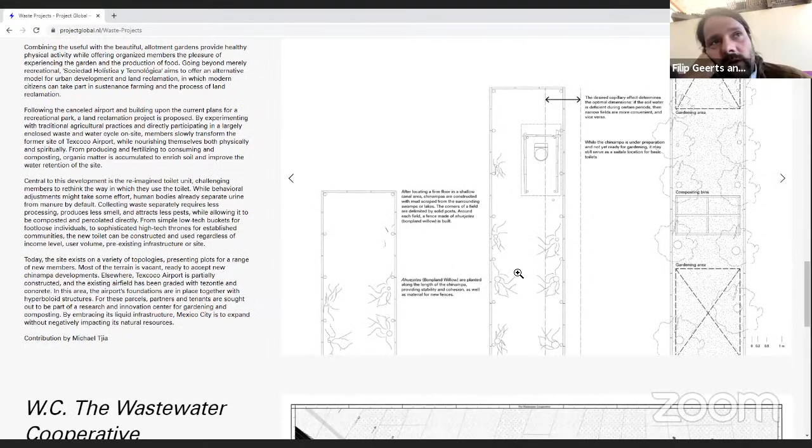And yes, it's too bad that there is too many metals in it. But let's say there is a kind of different relationship to the problem. It's like, okay, there is this thing, there's this environmental disaster, and it's like how to activate it somehow and see where you end up on longer term.

And you could say it's almost in the tradition of this El Caracol north of Texcoco, where they tried all these different things—the water was too saline—and kind of exploit the problem, literally. And I think it's maybe beyond, let's say, the kind of organizatorio or organigram-like relationship between the three projects, that all three projects need to found some kind of new company to do it.

It's also, I would say, beyond that. It's this relation to the environmental problem, not something to solve, but to exploit. And while doing that, it's maybe also solved.

Yeah, I was saving this comment for the end discussion, because there were two things that really struck me from these projects and the approach to it. The first one is, as you say, it's a very clear view and almost a critique of this solutionism that we have: okay, we see a problem, then we solve it, voila. And this is how Mexico has gotten into all the problems that we're dealing with.

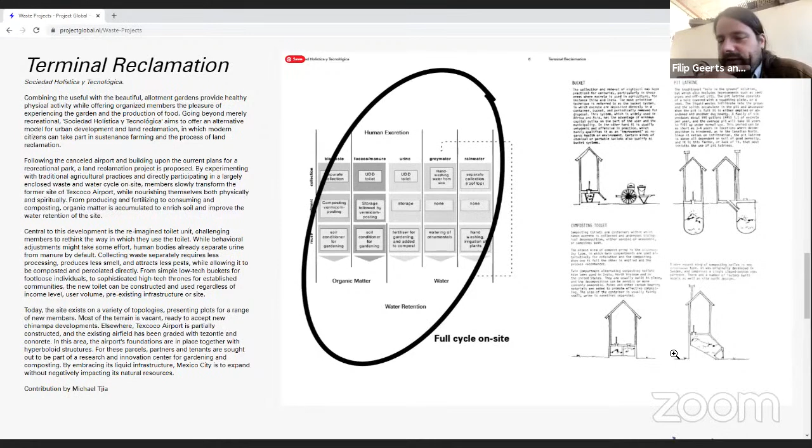Let's make it one giant Xochimilco, right? It's like, even Xochimilco is not really Xochimilco, right? So there is always a kind of new landscape formed.

I think that's strong, because most landscape projects sort of legitimize themselves by somehow restoring something that should, it's almost as if something should have been there instead of what is really there. So I think that's important, in my opinion.

Yeah, if I may, maybe part of the contribution that I made is that the current situation is one where, sure, the Texcoco airport has been canceled, but what they propose instead is this very utopian, pretty recreational park, with 16 baseball fields and 24 football fields.

And personally, I'm a bit skeptical as well, in the sense that how realistic is it? It just needs another politician to cancel that project, right? So how realistic is that? Starting with something smaller, something that could start with a cheap and individual-based solution seems more realistic.

You can do small steps while staying a bit more agile in the great scheme of things. And what I like about the toilet project is the small scale, not just in size but also in temporality. This is a very controversial project — the lake recovery projects have been around for at least 40 or 50 years. In my lifetime, I've seen 5 or 6 of these projects.

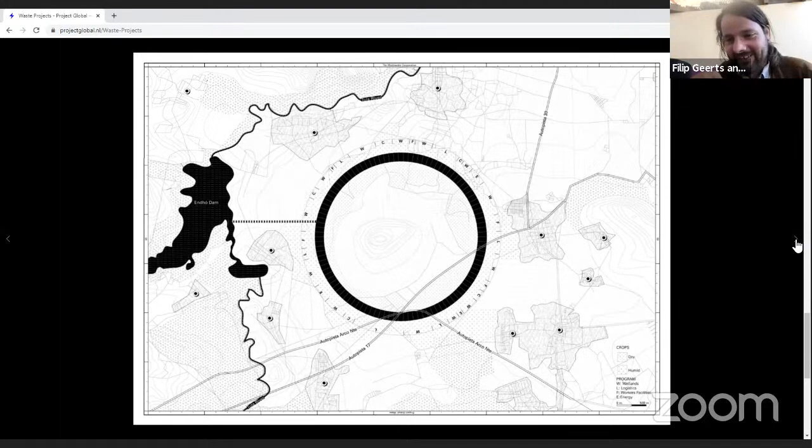Ana, to react to Chris's point — let's be honest, what you found out is that you don't have enough wastewater. So you found a situation where the desire of a land distribution project, or a land reclamation project — what was it, the part of your ring that could actually treat the waste? So you would have loved more waste, right? Exactly, yes. So that's what I meant by the inversion of the problem — you had an idea: let's fix the agriculture here, how much do I need to clean? Oh my God, I only have this amount.

And the fact that the rings started to multiply was in a way to differentiate, to have more intake points, along the Tula, right? Also to deal with this idea of decentralization that many of us are dealing with—again, this idea that if Atotonilco is one centralized thing and it's not working, we need to have many.

I was also wondering—sorry, go ahead. If you don't create... well, it's the same thing. But I was also wondering if you create new points of contamination, I think in bare landscape areas. How will these rings not become high concentrations of contamination? My English is not so good—it's the opposite of diluting.

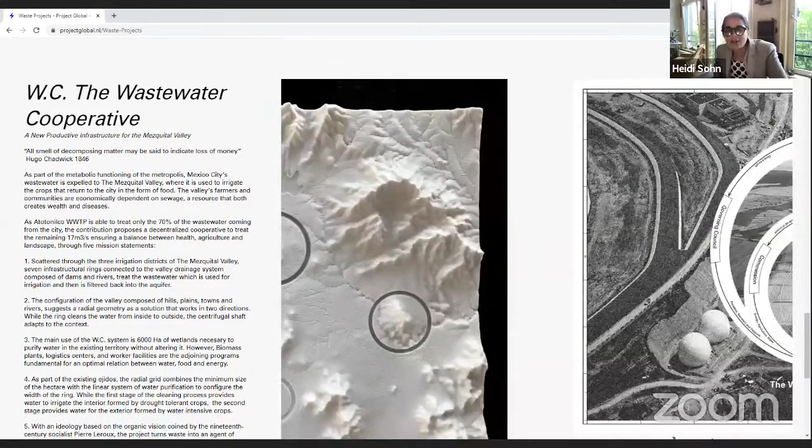There are several precedents. I mean, in my lifetime I have seen things as crazy as making an enormous hole in one of the volcanoes so that the polluted air can go through. So in Mexico, the scale of the solutions never scares us. We're willing to do anything no matter what—the more pharaonic and humongous, perhaps even better.

But one of the things I really like about these concentric settlements, if you like, is that it's not only about humans and what humans can do. It's also about how the idea of a concentric pattern is able to sprawl, spread, and control. And there are many precedents in the world for this.

Here in the Netherlands, one of the ways to purify water is precisely to throw it into this kind of marshland, where the sand in the subsoil actually cleans it from the aquifers.

In this case, I think one of the selling points for these concentric rings of slow wastewater management is that our vegetables and fruit could be eaten without being completely deadly. I mean, you try to eat a strawberry in Mexico without not only washing it but disinfecting it, and you'd get salmonellosis if you're lucky—otherwise you'd probably die. So we would never put anything in our mouth unless we want to risk our health.

So in these kinds of purifying rings, I thought there is a lot of potential, but it has been tested in some parts of the world. These kinds of crazy, enormous infrastructures—let's call them environmental structures—have been tested, and they actually work. So I don't know, I thought it was a really interesting approach. I don't know if it's feasible.

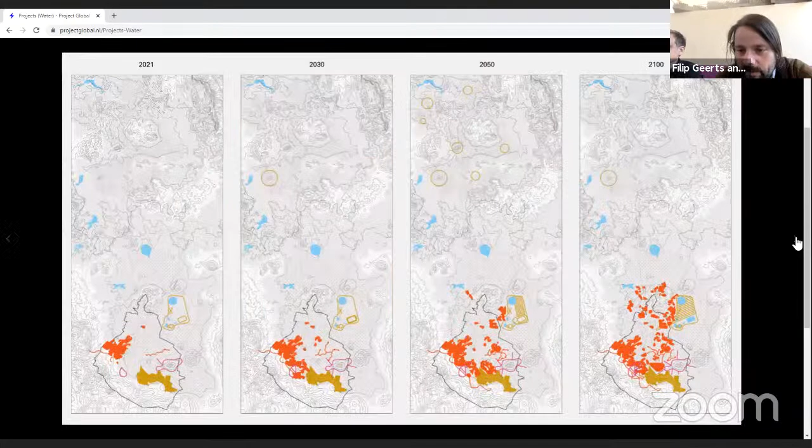I'll just get started. We're joined by Heidi and Chris for this purpose. Heidi gave a remote overview of the three chapters and also participated at an earlier stage in your inquiries during our ersatz fieldwork week, since we did not go to Mexico City, which by itself is maybe one aspect to reflect on. Chris also contributed to one of our ersatz fieldwork weeks and has seen today all the work across the three chapters, as well as the printed material and exhibition in school right now, which you can see in the background of some participants.

I think maybe as a structure for the discussion, we could try to address to what extent the projects confirm these preliminary categories that we came up with, which we used to structure our inquiry: the aquifer as a category, the supply, consumption, and waste ones. I don't know to what extent we now know more because of these projects, whether these categories make sense, are helpful, or should be challenged.

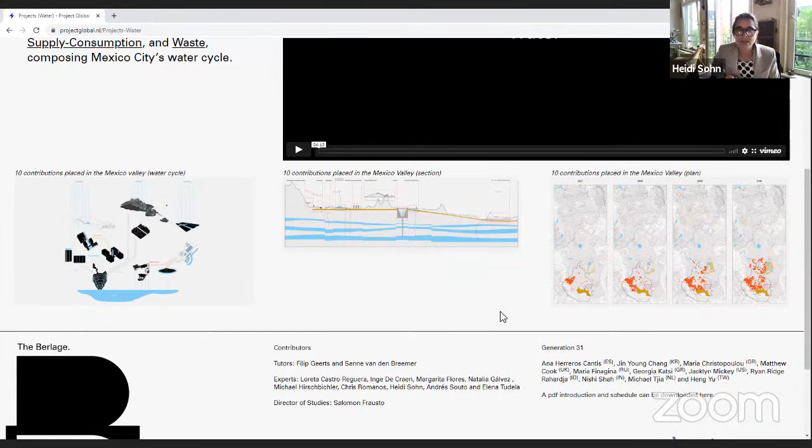I give the word to Chris for a second. I think it's, so I want to get back to...

The key thing I detect in how you all approach the projects is that you're dealing, to some extent, some more than others, with engineering. Having worked on engineering projects myself, I always have this question in my mind: what am I doing here, helping to design an engineering project, when my background is in architecture, whatever that means.

So when I see your projects, I wonder if you've encountered this question yourselves: what am I designing here, from my point of view, my knowledge? What am I designing in an engineering project? Because you don't have to see it as an engineering project, you can see it as something else, but that's how I would see myself in that. And when you ask yourself that question, how do you define the limits of what you are doing?

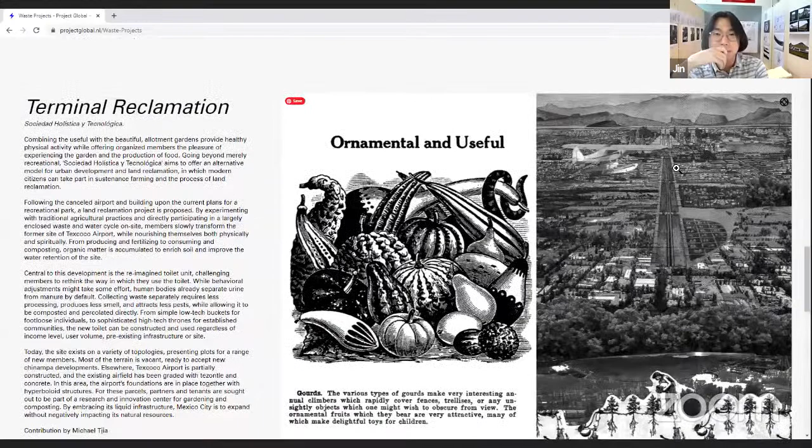Because you can do something completely fantastical and it looks great, sounds great in your head, but if it's completely ungrounded, then other than bringing an issue into discussion, there's no potential for it to be received by this culture, which is so much about solving a problem - to kind of bring that and change their perspective on things. I think there needs to be some level of possibility.

If I can react to Chris's point - I think it already came up explicitly, both in the first group and the last group, the aquifer first and the waste after. Yes, it's on a disciplinary level, engineering as a kind of category, which in a sense is universal. But I'd also say it's within a particular context.

Remembering watching together the H2O CDMX documentary, about injection wells - that predicament that yes, you can recharge the aquifer, yes it takes 100 years, yes you have to, in that particular lake bed sediment ground, make your water almost as clean as drinkable. So why would you inject it back in the aquifer if you just created very precious drinkable water? So it's not just the engineering, it's combined with a sort of economical paradigm of why to have machinery and fix the problem in this mechanistic way.

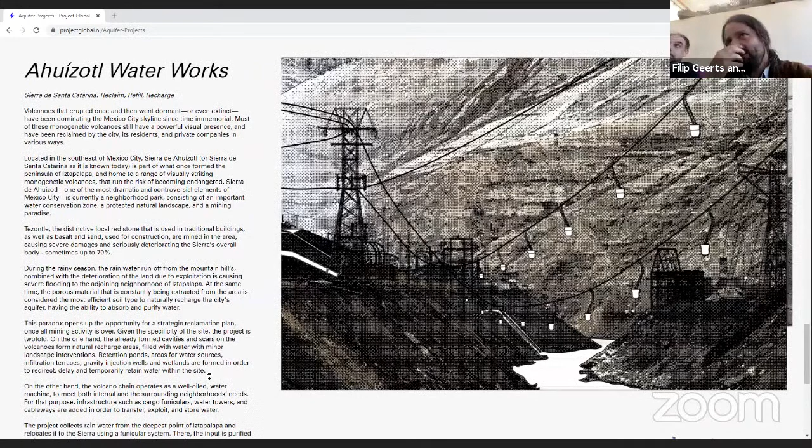Like in the Netherlands, it's the engineeredness, desires for it to be a total piece of engineering. It's not like a landscape in which you do engineering. And I think that's the main thing here: the engineering is bits and pieces which often compete with each other. So it's not an assembly of things that necessarily collaborate, but different experiments that enter in competition, all with the horizon of the same problems, acting upon that very particular landscape.

For me, this even challenges the more universal question about what we're doing attached to a kind of engineering problem. It's also an engineering problem in this context, where it's not from a synthetic point of view, but different competing interventions within the same landscape.

To make it more concrete, I think it goes back to Chris's point about the waste project, about what is the quantification or perimeter of these projects. How do you decide the scale when it becomes the project? For Ana, how many rings?

For Michael, what's the perimeter of this new allotment landscape, whatever you want to call it? For Jin, the same thing—what's the area to turn into Xochimilco again? I think the question of the perimeter is always in dialogue with the quantification. So Ana's has no perimeter, right?

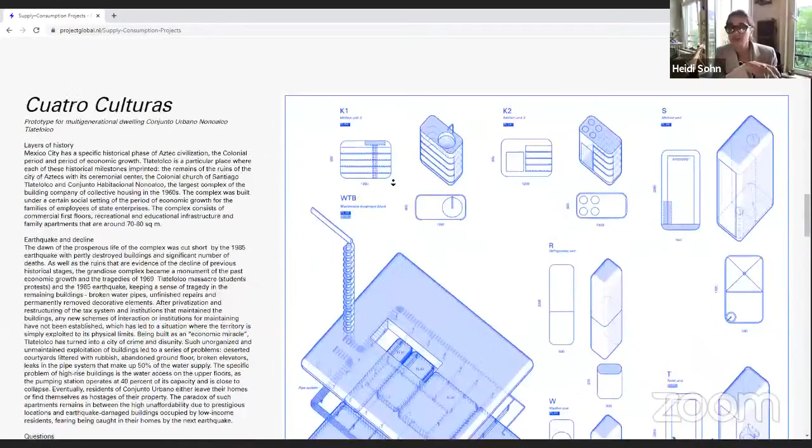It's where that threshold—not only in the scales or the extensive part, but also in the intensive aspects—when a practice moves from being a scientific discipline to becoming more of a practice-based craft. These are intriguing hybrid understandings of the royal sciences, as continental philosophers call them—engineering, life science, and so on—how these become minor practices. From the toilet to the tilapia, how you depend on the practice aspect of your engineering or scientific vision for it to have any impact on the environment.

To have a transformative potential. So I think it's super important that you guys think of this—you probably couldn't have gotten a more complex environment than what you got yourselves into. Really seeing these disciplinary limits, perhaps the perimeter of your sites are also the perimeters of the different disciplines, which are somehow in a cacophony and need some way to be articulated to produce the knowledge you need.

The engineering and so on, but also the practices to sustain this. Whether we like it or not, you need the social element, the collective element, to transform this landscape into an actual milieu, an environment. That's a technological question—really a technical question.

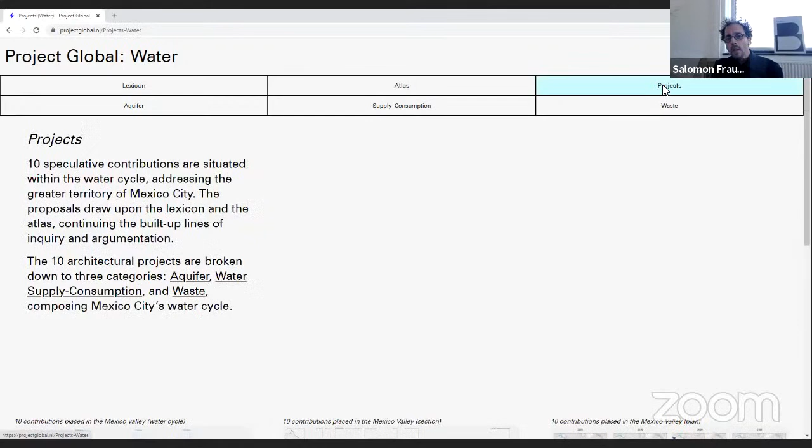If I can interject here, to sort of piggyback or digress slightly from Chris's commentary, I'd like to comment in hindsight, even though it's a bit fresh, about the idea of a collective project. The beginning of the semester started with a sampling of various materials to create a lexicon, that then framed itself as we had to negotiate what the work would be. In retrospect, the organization of these 3 panel sessions, or proceedings, was also meant to, ex post facto, make a collective project in the end, or summation, where there would be 10 different contributions tackling a larger set of conditions. I'd like to hear some reflections on that from you guys.

At least Michael, who's always outspoken, do you have a comment on this? Thanks, Salomon.

I guess dealing with this as a group project, let's say the instrument of seeing it as a water cycle, or this animated GIF on the website which rotates. Even though, as you said, it's not always productive to look at the water cycle as a cycle, in the context of this project it really helped put into place where our projects exist amongst each other. In this way we could identify clearly what were the blanks or overlooked areas needing more attention, or exactly the opposite, places with too much focus. So we used it to divide our interests and our workforce to hopefully make something substantial as a group. That's my initial reaction to this question, Salomon.

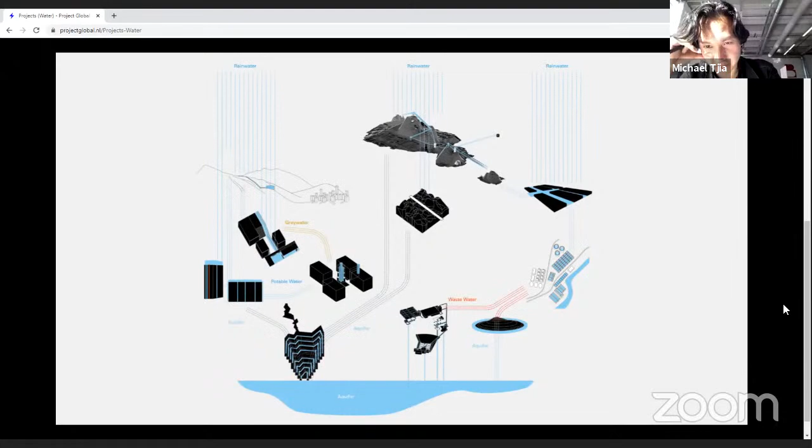I don't know, maybe someone else has different thoughts? Yeah, I personally really liked how we incorporated all the information related to the atlases and maps in this last part, talking about contributions on architectural projects, but still going back to the work of others and taking that information to rephrase the architectural contributions. The idea of having small introductions in each section—aquifer, consumption, supply, and waste—related to the maps and the atlas, to introduce the projects, was quite successful in my opinion.

If I may just quickly say, what I see is these 10 projects work as units—each one can stand on its own, with its own proposals and thoughts behind it. It raises issues and has questions. But together, these 10 unitary projects add more units of complexity to this type of assemblage. What I think it does is not only show and visualize what some of the problems in these systems are, but also show where they are connected. That's where I think of transdisciplinarity. All 10 projects have a more or less common denominator, but they enter these questions from different disciplinary perspectives. If we get used to this type of collective work, where 10 projects think more and better than one or two, we can think of these collective projects as forms of assemblages—something changes in one, there is an impact on all the rest. Perhaps I'm abstracting it a bit too much, but that's what I could extract: there are a lot of units of complexity involved in this collective endeavor.